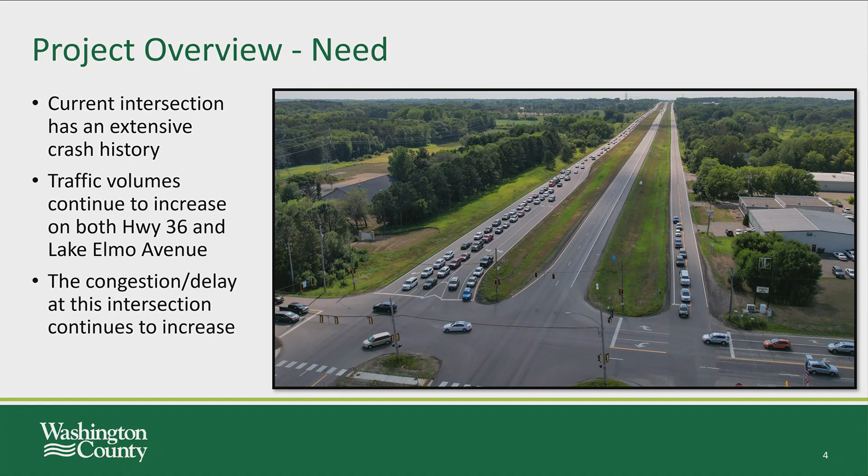Before I present the recommended alternative, we realize that it has many benefits, but it does come with drawbacks. In addition, due to the location of the existing buildings near the roadways, there's no silver bullet solution for this intersection.

So therefore, if we do nothing at this intersection, delays will continue to increase, safety will decrease, and pedestrians, bikes, and snowmobiles will have limited options to cross Highway 36.

With much support from everyone in this room, we were able to successfully secure $30 million in federal and state funding for this project, with an additional $11.5 million of local funding programmed in 5-year CIPs.

We're currently finalizing the intersection study and environmental documentation phase. Final engineering is anticipated to begin shortly and will be completed in 2025, and necessary property acquisitions would then be acquired.

Similar to the recently constructed Manning Avenue interchange, we expect that construction of this project will last 2 full construction seasons, kicking off in the spring of 2026 and then wrapping up in the fall of 2027.

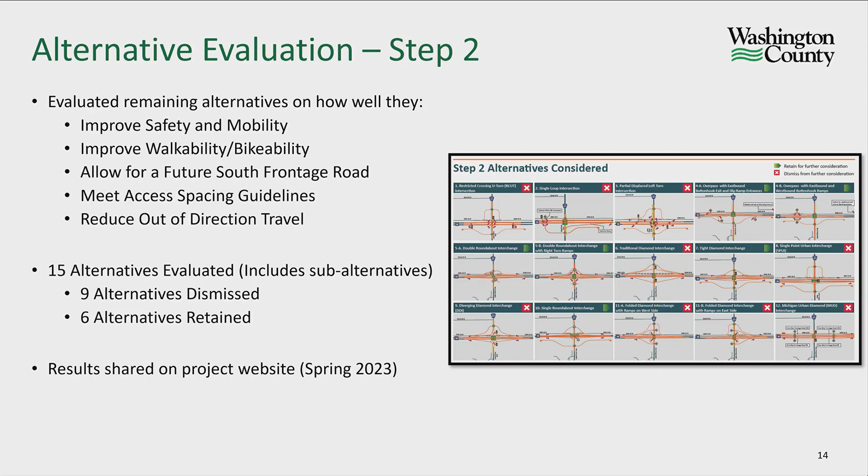Additional criteria was evaluated in our 3rd and final step of the process, including costs, property impacts, and wetland impacts. Through this step, two open houses were held to gather feedback from the public on the alternatives that were still being considered.

Based on a combination of input from the public, feedback from our project partners, and our technical analysis, we are recommending the button hook ramp alternative, as it is a significant improvement to the existing intersection while minimizing costs, minimizing acquisition of private property, and minimizing project footprint. We did want to note that this is a cost feasible option that can be funded today.

So maybe I'll pause there. We could look at the layout, there's interest in that. I do have it on the screen. It kind of shows that preferred design. So if there's interest from the council to go around the table and look at it, we could do that at this time.

Councilmember Beckstrom: Just one question. I know in 2021 when we had the elected meeting, one of the things we brought up at that time was the Keats intersection, because we were getting a lot of feedback at that time with it being so dangerous. So is that included at all in any of these plans addressing that intersection?

Yeah, that's one of our short-term next steps. I'll just flip to that. So we are looking at doing some additional analysis regarding the planned closing at Keats Avenue at State Highway 36. Really, we're looking at that to ensure that closure does not impact our design.

So we are looking at that closer, maybe just to provide some perspective, looking at traffic volumes in this area. The average daily volumes on 36 are about 40,000 vehicles a day. Manning Avenue has about 20,000 vehicles a day. Lake Elmo Avenue has about 5,000, and then Keats has 1,000.

So when you look at the big picture, the volumes on Keats are relatively low. But we are doing that additional analysis, and we're working on that over the next few weeks, just to ensure that if Keats does close and the frontage road is extended on the south, that we're making sure there's no fatal flaws with our design of that future closure.

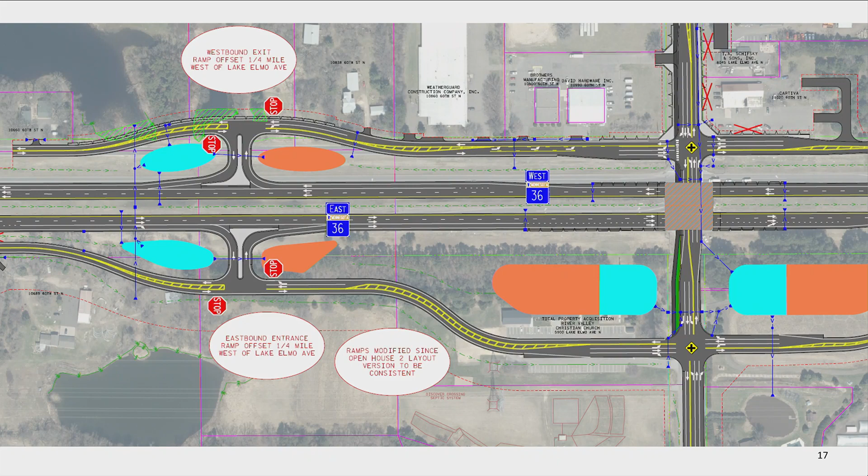And again, I apologize for my uncertainty on this, but with those properties outside of the River Valley Christian Church, are those conversations that have already been had with them as far as, is this land that you're open to selling, or how does that process work?

Yeah, so council member, our next step is to better define those construction limits. We're going to be working on that over the summer. Really, right-of-way acquisition begins in the fall of this year. That continues through 2025.

A number of these property owners have been engaged on the project and have been coming to the open houses and reaching out to us. But until we really get consensus on one preferred alternative, we haven't had those detailed conversations yet. That makes sense. That is coming up in the process. Okay.

Have there been projects of this size and scope in the metro where they have used button hooks recently? I'm not an engineer, but from driving in the metro, I feel like... I'll refrain from what I was about to say.

Is it still a best practice when there are other options? Yeah, I don't know about recently constructed projects, council member, but I know there are projects in the metro under design that are considering button hook alternatives. I don't recall the one offhand, but I believe there's one in the North Metro that MnDOT's looking at as well.

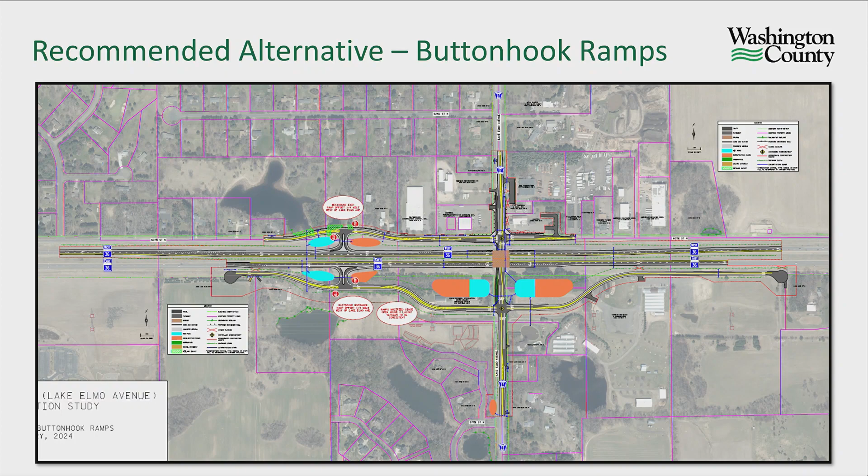So why does it have to be so far south from 36, unlike on the north? I'm not an engineer, so I'm sure there's a perfectly logical reason, but in layman's terms, why does it need to be so much further south?

Council member, it's really to provide good access spacing. If you look at the intersection of 62nd Street and 60th Street, and then where this new intersection for the new South Frontage Road is, it's to provide that equal spacing between them, really trying to get good spacing between those intersections. With the River Valley Christian Church relocating as part of the project, there's an opportunity to shift that south intersection south as well.

Administrator Schroeder, so just for council's information, and correct me if I'm wrong, but this intersection, the Button Hook, is roughly funded with a contribution from Lake Elmo of about $4.5 million. If Lake Elmo wanted to have the tight diamond with Button Hook instead, you'd be looking at Lake Elmo alone putting in an additional $10.5 million roughly.

I mean, if they're— Administrator, you know, maybe taking a step back, we see this as the cost feasible option. If there's a partner agency that is really pushing for the tight diamond, we would expect them to come to the table to help close that gap of $10.5 million.

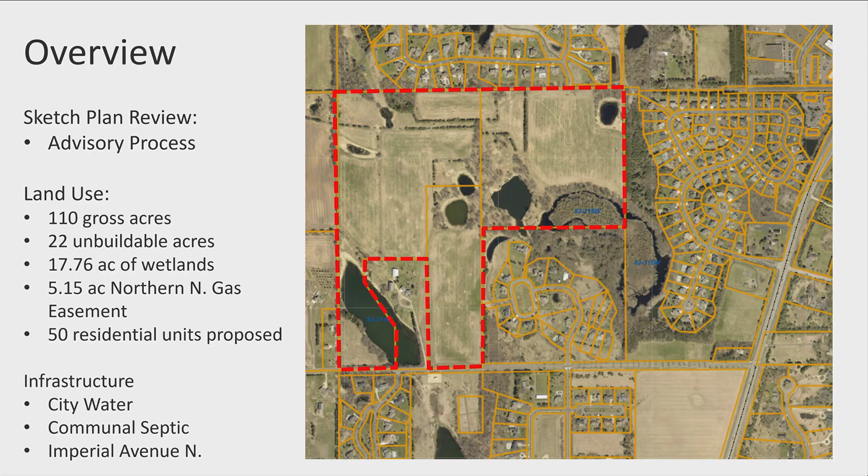There are 50 residential units proposed for this project. The infrastructure entailed here would be city water, which would be looped through the site. Communal septic would serve the sanitary sewer needs for these residents, and a connection will be made through the development from 50th Street to the street to the north.

So here on the screen, you can see the site plan. This was included in the staff report, so I won't spend a ton of time going over some of the various details here, except for what feels most important for this discussion.

So again, this proposal would have 50 single-family detached lots. Almost all of these lots would be over a half acre. Only one of them is less, at about 0.47 acres. Again, there would be a connection from 50th Street North on the south side of this site all the way up to Linden Avenue North on the northeast corner.

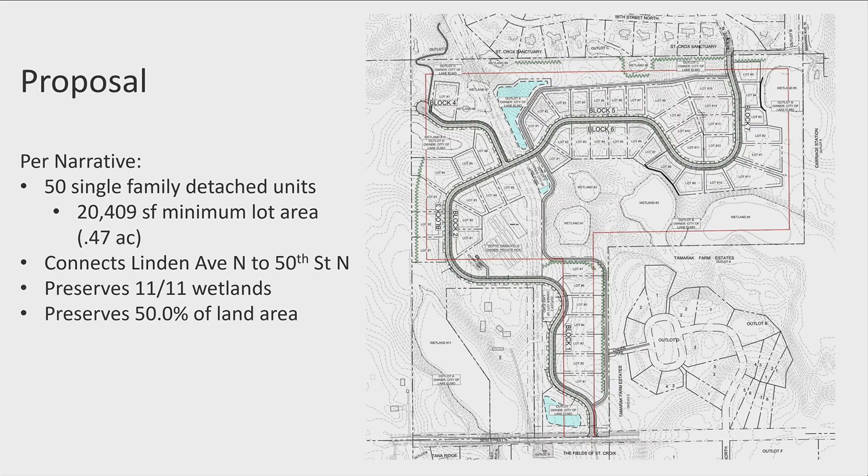There are 11 wetlands on the property, and of those, it appears that all of them can be preserved. This development would be required, as OP developments are, to designate 50% of the land area as conservation and open space into perpetuity.

So here on the screen, you can see the location within the community as well as the future land use guidance, which in this case is rural area development. The RAD future land use category allows 0.1 units per acre, but with OP developments, additional density can be approved.

The zoning is agriculture, rural residential. The entitlements that will be required after they go through the sketch plan process are major subdivision and open space planned unit development application. They are requesting, I would note, additional flexibility beyond what's in the city's ordinance. That can be approved by the city, but it does require a supermajority approval.

So we talked about this last time, about an open space development. The city does have 10 existing OP developments, they're called. These were all approved between 1997 and 2006, so it has been some time since the city has approved one of these developments.

The purpose of the OP development is to provide greater flexibility in rural contexts to maintain the rural character of the community, primarily agricultural and natural resource amenities. There are benefits provided through open space preservation developments that have to justify the approval. There are some basic requirements for all OP developments. One is that density cannot exceed 0.45 units per acre.

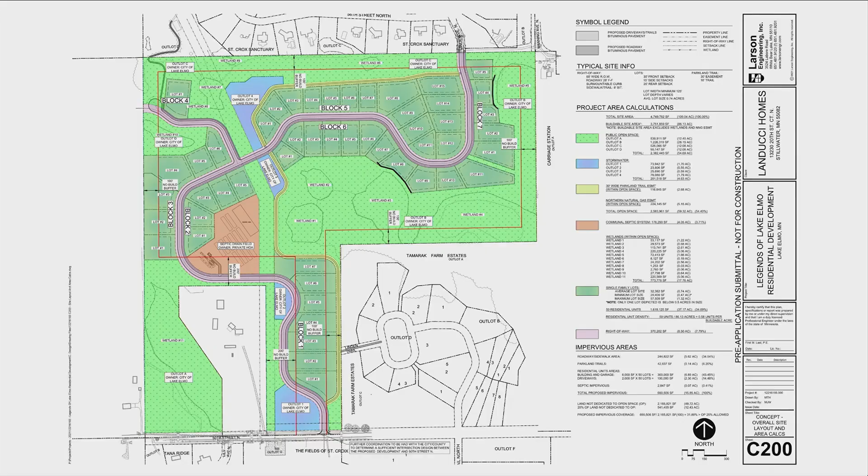The community septic is located near the center of the site, in that kind of red color. And then some of the storm ponds are proposed in blue. Again, this is a concept level plan, so some of these things have not all been fully nailed down, but this has gotten pretty far through the design to be considerate of some of the city standards.

So there are some flexibility requests that go beyond what can be approved just in the base OP ordinance. One thing to note is that 50 units are proposed, and under the review of the ordinance, 39 units would be the maximum. This is because the ordinance relies on buildable area. In this case, you've got 110 acres, but only 80 or so are buildable, so if we took the 110 into account, that would allow them to build 50.

But in this case, because we have to use the net developable area, that takes it down to 39. Impervious surface within the developable area does go above 25%, and again that takes out the open space being preserved and just focuses on the portion of the development that is being developed. There's one lot that is less than 0.5 acres in size, and there is a street encroachment into the required buffer that I'll talk about as well.

So a few issues or considerations to work through. One is the enforcement of the 100-foot no-build buffer. Buffers are required of OP developments that are adjacent to existing or future developments. You have 100 feet required when adjacent to an OP development, and 200 feet required when adjacent to a normal residential property that's not an OP development.

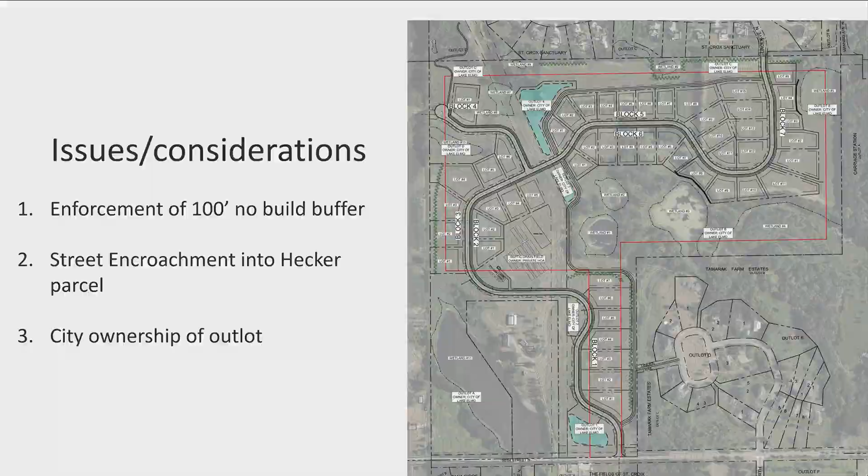The last thing I wanted to talk about here is the city ownership of the common area. In most cases, the city is requiring that those outlots housing the open space be owned and maintained by the HOA. That is certainly what staff would recommend the city require moving forward, but that is currently shown by this plan as being owned by the city. So I just want to make that clear - that might be an issue because it would require ongoing maintenance from the city.

Staff have provided some comments internally on the project. The city engineer provided a good memo on some considerations for infrastructure. Notably, public water should be looped through this site from existing connection points. There are trails provided, and there would be other requirements for right-of-way and easement dedication. This is outside of the MUSA, so community septic does have to meet state standards if it's regulated by either the state or the county. The fire chief provided some comments as well, and we also heard from Washington County on this request and the Valley Branch Watershed District.

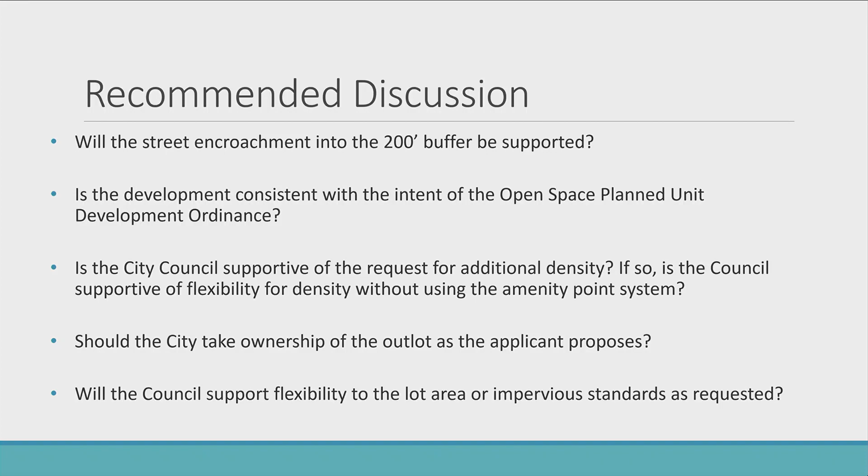That gets me to my recommended discussion questions for you this evening. These were listed in the staff report, but they will help identify to the applicant some of the feedback they will need to move forward. That being said, the applicant is here this evening and would be happy to speak to their application as well. At this time, I can take questions or defer to the applicant.

Councilmember Dragisich asked: Has anyone talked to the Heckers about the street being in that 200-foot buffer, and have they expressed any thoughts? I would ask that question to the developer. I personally don't know if there have been any conversations with that property owner.

Maybe just some clarification here. Currently, this land is guided for rural area development, which would be 1 unit per 10 acres if this was developed as we have it intended, or as we have it planned. With this, it would turn out to be, they're asking for 0.45 units per acre, which would be 4.5 units per 10 acres, which is above what the OPPUD would allow. What would that number be at? Maybe the math would be...

The number that the applicant is requesting is effectively 0.58 units per acre. What's allowed by the OPPUD ordinance is 0.45 units per acre. The city does have a future land use category for this property that would allow, if outside of an OP development, only 0.1 units per acre. Could you say that one more time? So the OPPUD allows for 0.5 units per acre, but they're asking for 0.45... Councilmember Hearn, the city code in the OPPUD ordinance allows 18 units on 40 acres, which comes out to 0.45 units per acre. That's what's allowed by the city code when someone receives approval for an OPPUD.

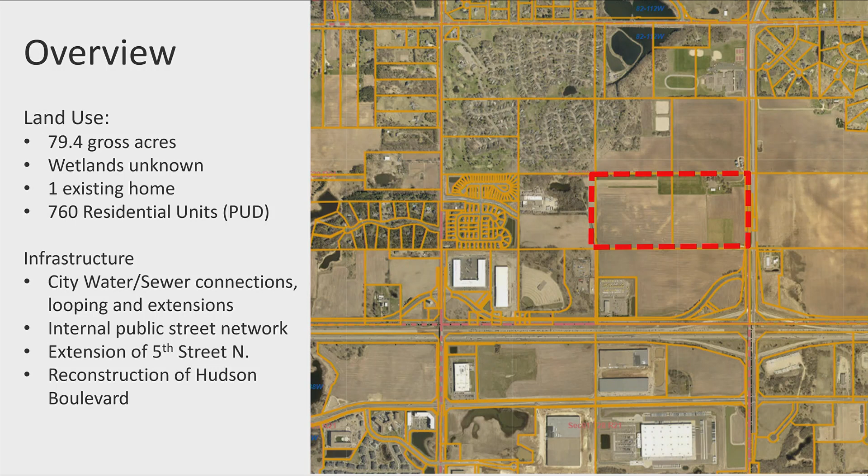This would very likely be through a planned unit development process. Infrastructure connections, this is a site that is non-contiguous with existing development, so just as a reminder, city water and sewer would need to be brought to this site and then through it at the expense of the developer. They are aware of that requirement and submitted a plan showing how they can get that done. There is also required realignment of Hudson Boulevard and an extension of Fifth Street North.

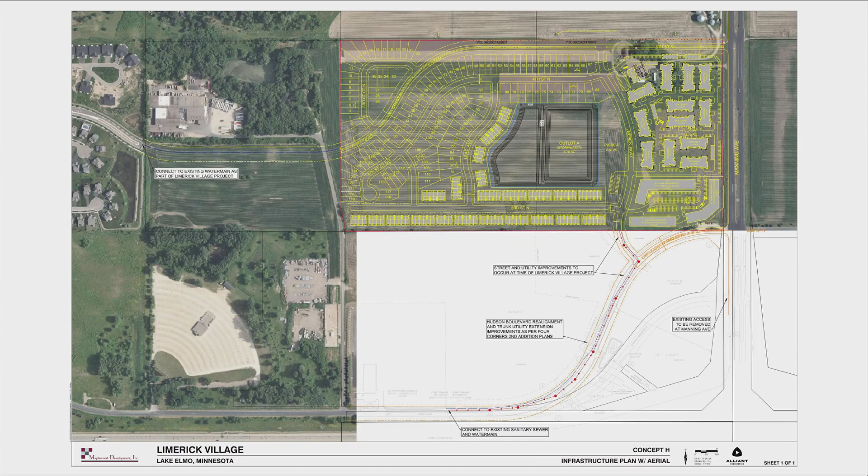On the screen, you can see the infrastructure plan that was provided with the packet. A couple things to note, obviously Hudson Boulevard would need to get realigned, there would be water and sewer in that same alignment, and then water would have to get looped with this development providing a considerable number of additional units.

Here's the site plan, should we need to come back to it. This is pretty similar to what you saw last time, and I'll talk about some of the changes as we discuss density, because we did talk about a comp plan amendment possibility last time.

In terms of future land use guidance, the site is split with a guidance of medium density and high density residential. Medium density requiring between 4 and 8 units per acre, high density between 8 and 15. The zoning for this site should be aligned. Currently it is rural transition, but it eventually would be medium and high density residential.

Entitlements required for this project notably would include an environmental assessment worksheet, that would be at a minimum for the environmental review. If the project gets through that process and doesn't need to go any further with environmental review, then we would expect a major subdivision, rezoning, and planned unit development request. Currently, with what we're seeing, I would actually fix the slide to read that a comprehensive plan amendment is not required as proposed at this time, and I'll talk about why.

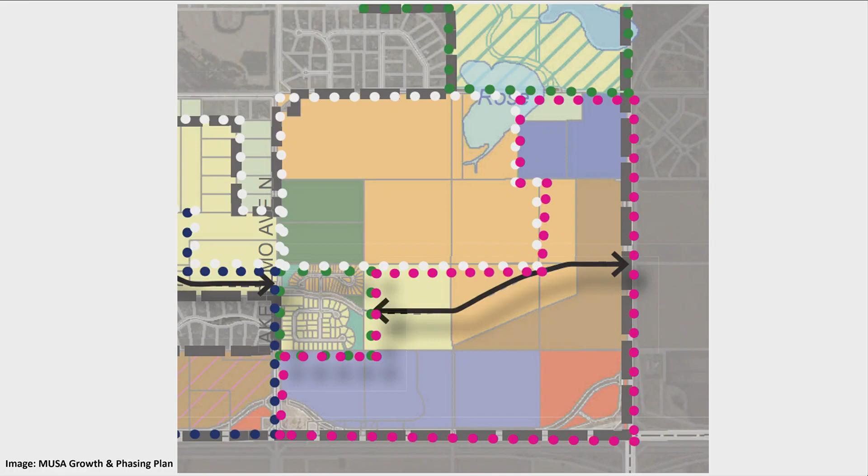So here's a zoomed in view on the site, and you can see the current future land use guidance. On the next screen, this is the city's MUSA growth and phasing map. This project is within the 2020 to 2030 development decade.

As comprehensive plan conformance goes, we talked about some of these things last time. I'll go through this slide quickly, but the land use guidance is in the top right corner. Now I'm going to switch to the site plan, and you can see that the site plan and density exhibit provided by the developer now very closely aligns with the future land use guidance.

The developer has determined that they don't want to go through any comprehensive plan amendments for the project. So we have worked with them to help them understand the requirements to stay out of a comp plan amendment, and what you see on screen now does accomplish that. We've worked with Met Council staff to make sure this project wouldn't need a comprehensive plan change to the future land use areas as proposed.

Can I pause on that? And I'm not the designer—would that also hypothetically mean that the line itself can be changed as long as the total gross acres remain the same? That's a good question. So if the developer were to try and move, like if we have 10 acres of HDR and we want to stay having 10 acres as an example—yes—

we can't move the line at all. It has to stay fixed, and a comprehensive plan amendment would be required if we were to move, I'll call it the green and the pink, into some different configuration—even if we kept the same area, a comp plan amendment is still required. So if the council felt they wanted something different for the view shed along Manning and wanted to flip it, even if the acreage is the same, it's still a comp plan amendment. Correct. Yep, wonderful.

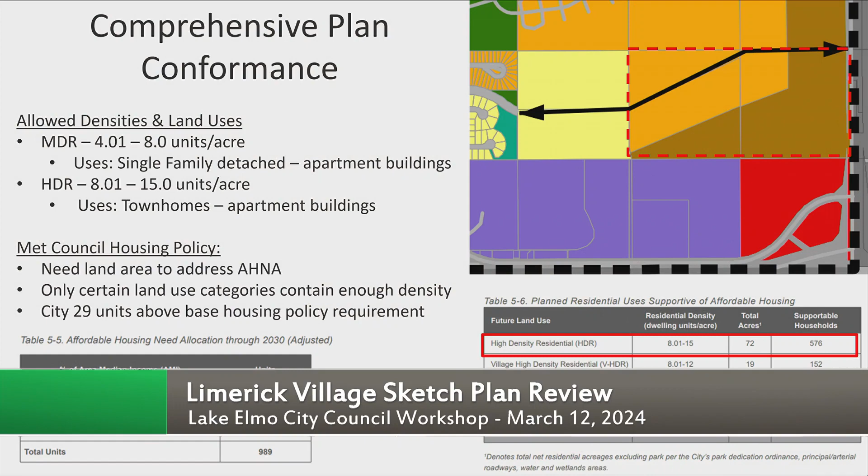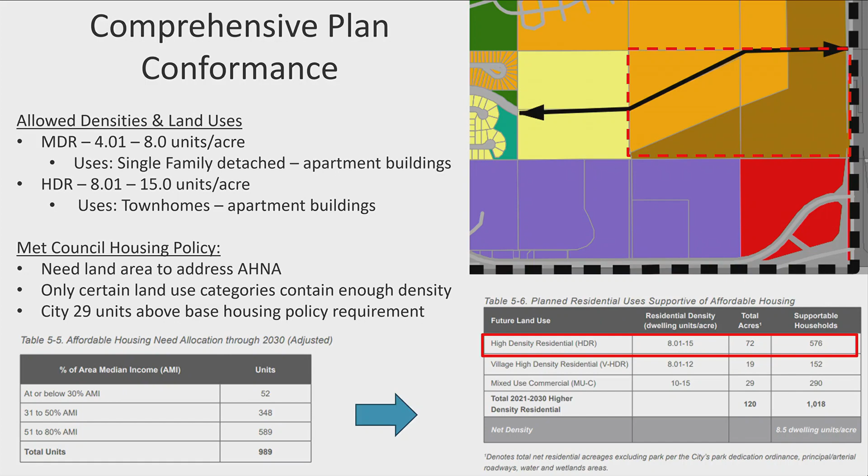Going back to the guidance here, on that top right, when the city creates the comprehensive plan, to some degree it's a little speculative. It's saying we want high density on the Manning corridor, tapering as we go north, then medium density transitioning into low density residential. That's not uncommon, but what that means for developments is that if they don't want to do a comp plan amendment, they have to work within the confines of where we draw the lines. That's the case here.

The developer's proposal does accomplish meeting that high level of guidance, specifically providing the number of units needed within each area to meet the density guidelines. In the pink, medium density area, there's a floor of 4 units per acre and a ceiling of 8, and they're at just over 4 units per acre there. You'll see a lot of detached single-family homes, which is about as close as you can get to single-family homes while still meeting that floor of 4 units per acre.

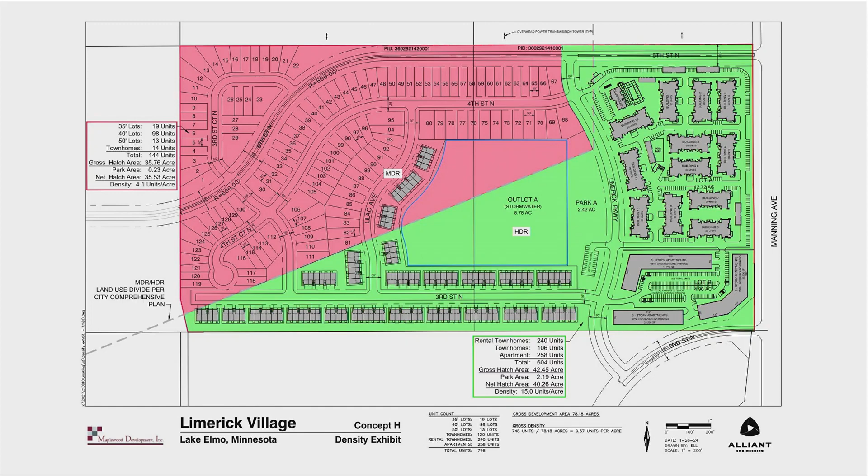In the green area, the high-density residential, they have a floor of 8 units per acre and a ceiling of 15, and they are just under that ceiling of 15 units per acre with the type of development they're proposing.

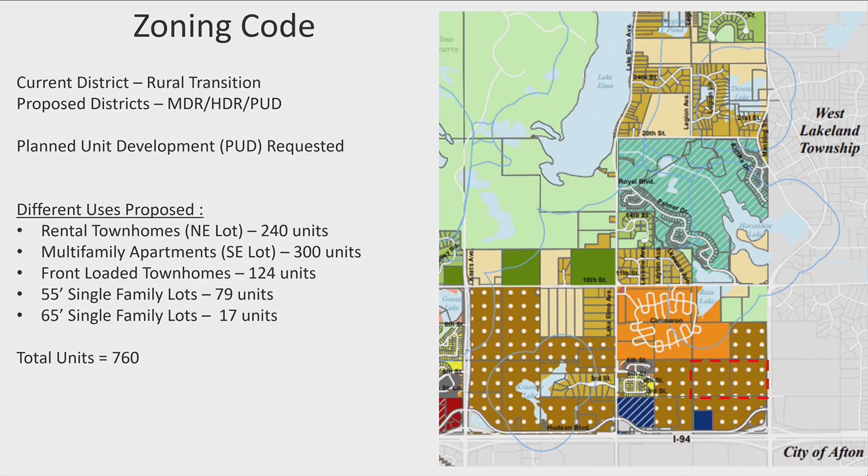I'll keep things moving, and feel free to stop me where you have questions. I'm not going to get into the zoning too deeply at this point—we've focused at a high level on design considerations, and we've also worked on reviewing the site relative to the city's design standards manual. I'm going to move to the next slide here.

I wanted to share the exhibit the developer provided for open space. With PUDs, 20% of the development should be kept as open space, and you can see how they plan to accomplish that requirement. The center of the site is proposed to be both a city park and a stormwater pond area, and we'll talk a bit about the proposed improvements there as well.

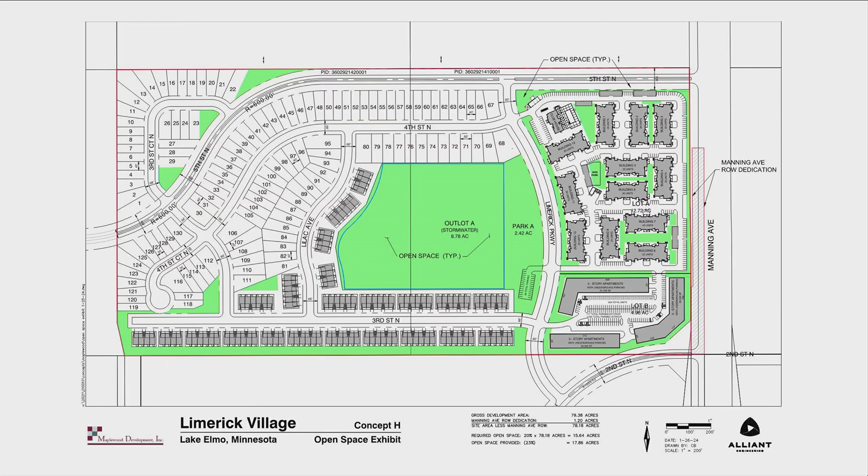First, I'll talk about the different elements of the site, the different units, and some of the considerations for both flexibility requests and then the design considerations the city will have.

So we'll start on the top right, Lot B. These are rental townhomes, 20-unit buildings, similar to the Springs development just north of Hudson Boulevard. It does appear that a PUD flexibility would be required for setbacks for the accessory garages.

They're on the north side of that site. That is a triple fronted lot, which means all sides are on a public road - Manning, Fifth, and the internal Limerick - those would all be treated as front yard areas.

Design considerations: one of the things we've heard in conversations with the city's fire chief is that we would be looking for a more grid-like pattern of these buildings to facilitate the circulation of emergency service vehicles. Another key consideration for this site is its location along Manning.

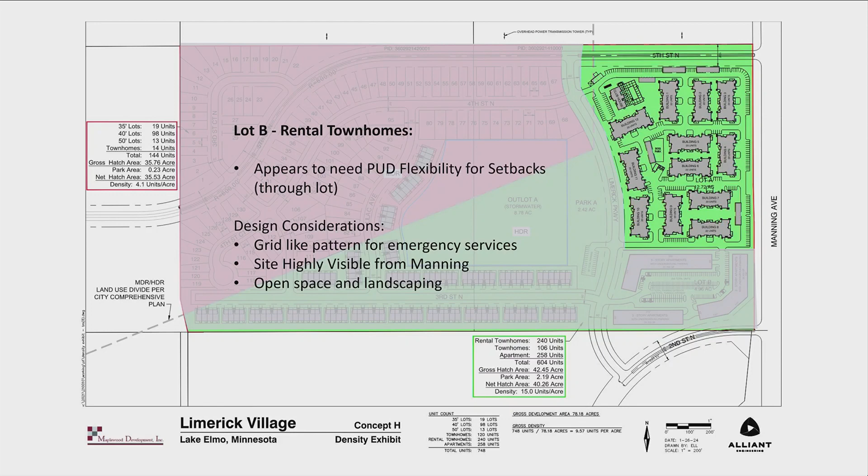This is a highly visible corridor within the community, kind of a gateway to Lake Elmo. So treatment of how the site's buffered from there, in addition to the architectural materials, should definitely be closely considered. And lastly, the relationship between open space and landscaping also creates the feel for this particular area of the site.

Lot A is the 3-story apartments. These were initially 4-story. The units have been reduced to make them 3, as far as I can tell.

Here we do anticipate a request to deviate from the city's minimum lot area. That minimum lot area is based on the units in a multifamily building, and so in this case, with the number of units, we would require 10.66 acres. Currently just under 5 are being shown here.

The parking requirements and how they would meet would be determined based on the unit mix, so we just don't have enough information at this time. It's possible that deviations could be needed in the future.

Some design considerations for you is that this is definitely the most prominent corner of the site. It's got visibility perhaps even from the frontage road serving Interstate 94, so this is very prominent.

The materials on these buildings, the massing, where they're located on the site - these are all very, very important. What staff heard last time is that architectural and design was going to be very important for this project to meet the character of Lake Elmo, and so this is a very important part of the site.

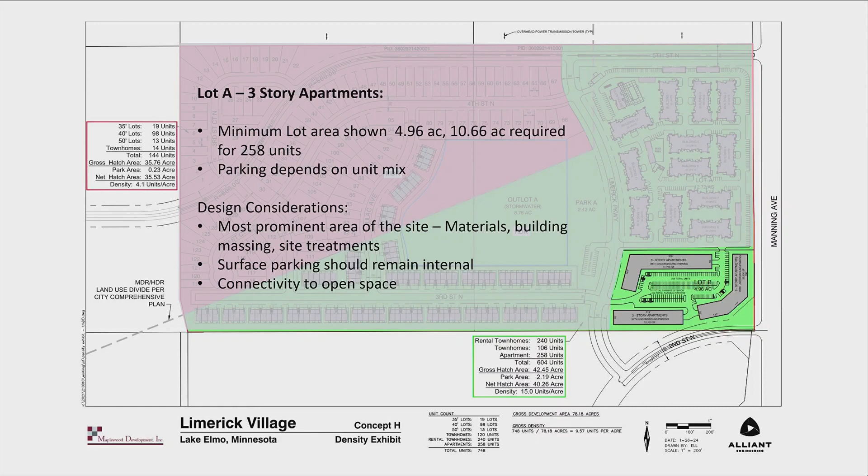Surface parking definitely should remain internal so that the prettiest parts of the site are shown to the rest of the world. Then connectivity from this site to the open space is also important, as we don't have a ton of open space on this site, and they're requesting to be under the minimum lot area.

So these are on the south, mostly the south area of the site, front-loaded townhomes. They range in 4 and 6 unit attached townhome buildings. The city has a requirement to avoid parking in front yard areas, which this would require a deviation for.

Some design considerations: again, these townhomes are going to be most highly visible from Limerick Parkway, which is that internal street. It is possible to have them kind of double loaded, and what that means is having an entry on both sides of the building.

It's possible that the buildings could open out onto this open space, the central open space, and be rear loaded with a garage in the rear.

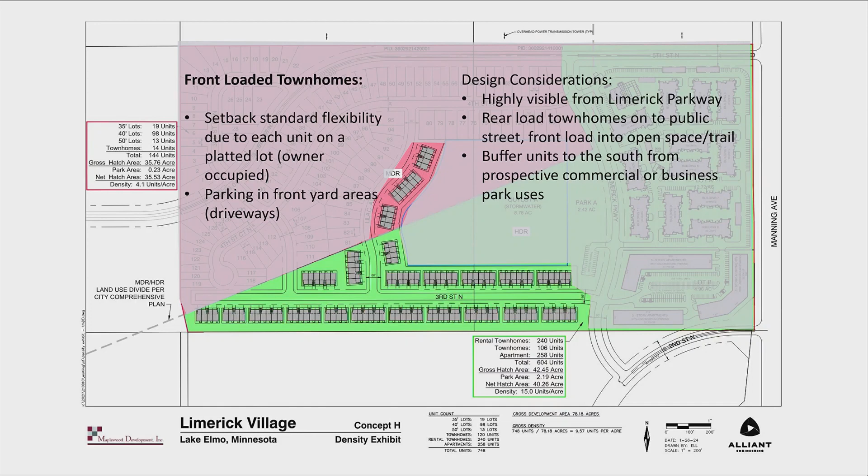Another important consideration here is buffering the units on the south from future industrial or business park commercial development.

Lastly, we have a mix of different single-family lots that are proposed: 50-foot wide, 40-foot wide, and 35-foot wide single-family detached lots. The most prevalent lot proposed is the 40-foot lots. The 40 and 35-foot lots would not meet the city's minimum lot width requirement.

We would also expect that they would need side yard setback deviations to have a reasonable building footprint. They're probably going to have at a minimum a 2-car garage, and so it'd be something that staff would want to see - if these are front-loaded, meaning the front of the homes face the street, that's going to be a lot of garage doors. Staff just kind of encourage you to discuss that particular point of this proposal, and I think seeing layouts at some point would be very helpful for how those sites are laid out.

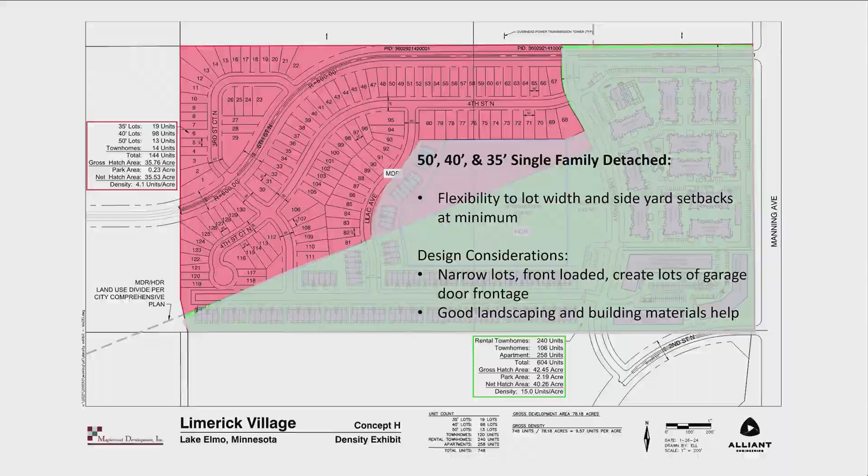Good landscaping and building materials can really help in situations where we've got buildings in close proximity.

So just to summarize, this slide has all those flexibility requests that I've talked about. I would add that this is still a concept plan, and as additional details are provided to the city through future applications, we may identify more needs for deviations. That's the nature of the game here.

We have gotten review comments from internal review staff and others. Jackson City Engineer's comments, number one, this is obviously non-contiguous, so those infrastructure connections are very important. Hudson Boulevard alignment is also going to be part of that, and phasing is important here as well for utility and road connections.

The city's fire chief has echoed some of those concerns about phasing and always providing 2 points of access for emergency services. And we've also gotten comments from Washington County and Valley Branch.

Parks Commission did have an opportunity to discuss this at their meeting on February 21st. There was a discussion with the applicants about the area of the park that's proposed, and specifically 2.5 acres are proposed to serve the park dedication needs. This is in a park search area for a neighborhood park.

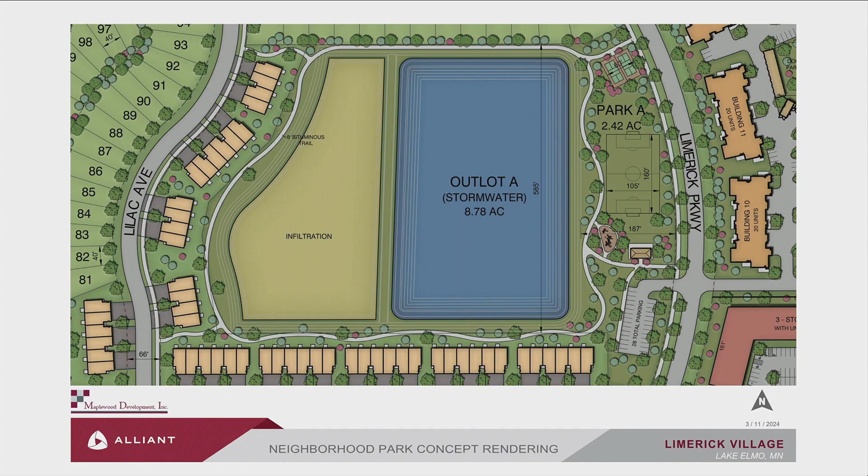Here is a figure that the developer submitted after that meeting to demonstrate how the city park might be laid out, and also how that works in tandem with the stormwater area. I'm sure the developer who is here this evening would like to speak to this particular figure as well.

So I have some recommended discussion questions in the packet for you this evening. Number one, is the park suitable in terms of location and area? Some of the deviation requests that we're seeing as well would be helpful to get feedback on. So that's what I have formally prepared for you.

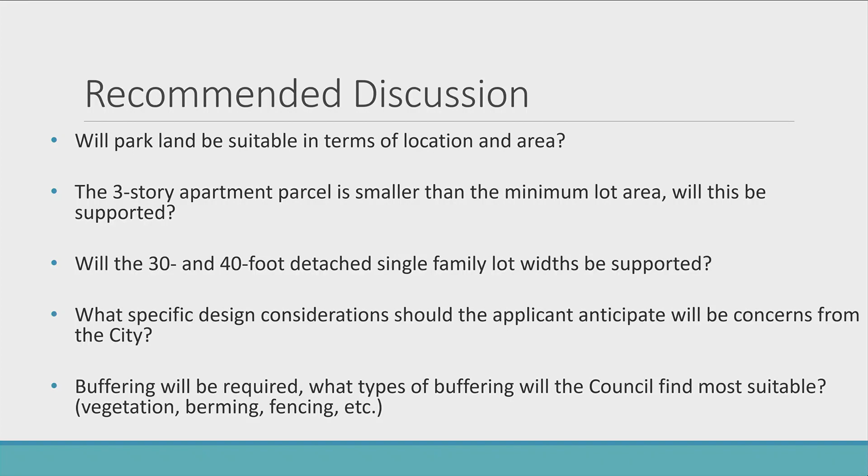I would note that the applicant is here this evening and probably eager to speak to their request as well. They did share some exhibits with me, which I can pull up on the screen and provide for their discussion with you. So happy to stand for questions, council.

Yeah, just one clarifying question, so with Lot A with the 3-story apartments, if we go back to that slide, it was 10.66 acres required for 258 units. And the way they're presenting it, they're trying to fit 258 units onto 4.96 acres, is that correct? Correct, yep, that's what's being requested.

So then, if I'm doing the math right, with the 4.96 acres presented, what would be allowed without a variance would be 121 units. Yeah, so if you found whatever, it's like 1,800 or something square feet per unit, that's the unit-based count. That's what we're going to use in terms of the math. So I'm sure you found that and did the math. Got it. Correct. Okay, great.

And then with the medium density land, obviously we're right at the bottom edge of that, with the 4.1 units per acre with how it's proposed right now. So they really, with their current plan, can't just get rid of a few of those or make them slightly bigger, they would be below it. Would other options then be they would have to do apartments, but more spaced out? That's a great insight, that is the case.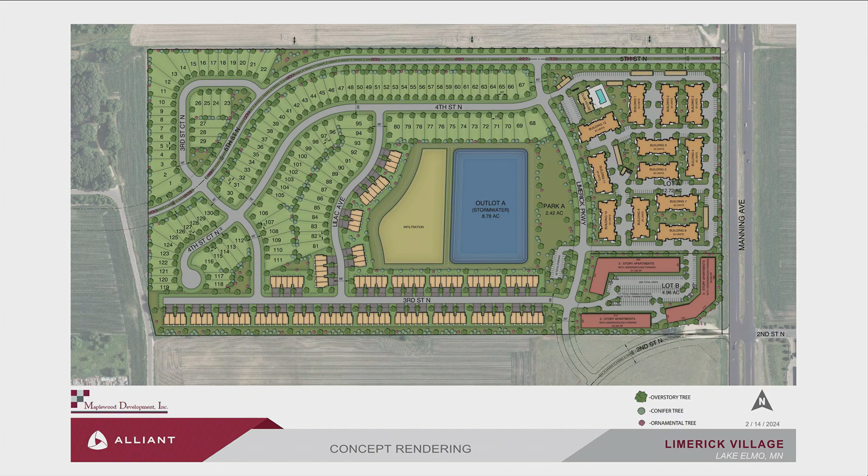Back to the requirements. To meet our medium density baseline, we were trying to fit in here something that we thought would be of higher quality and not just load this up with townhome units. The townhome units as front-facing gives it more of a walk-up. It's not the back-to-back units that can be a little too dense, frankly. It provides more of a brownstone kind of look, and that's what we were trying for. So I hope that helps answer what we were trying for here, more than anything else.

So, clarifying question: as we're looking at the southern side, we have a great deal of experience with this exact issue in a development just west of here. We're looking at Third Street North and potential units there, townhomes, correct? Correct, that are then buffered up against a property future zoned for a far more intense use. I'm curious in terms of the placement, because there's a diagonal going northeast to southwest generally speaking. Is there any reason those are in that location versus, say, spreading the three apartment buildings lengthwise along that? I'm just asking the question.

I view those as being different in terms of the expectations of being next to a higher level, more intense use. I do see a townhome user as having a bit higher level of expectation for that barrier, the ability to prevent that view shed, than say someone in a three-story apartment building. Just my two cents.

Well, I think you have to define intense use. The hard fact is that industrial uses aren't quite as intense, and you really have the back of a building that's also buffered, and you have privacy back there. We've done a lot of it. As I mentioned at our earlier meeting, we finished a project up in Maple Grove where we had residents backing up to a Hy-Vee. The back of the building was, I guess, the best neighbor you could ever imagine because it's well maintained and there isn't traffic right up against them.